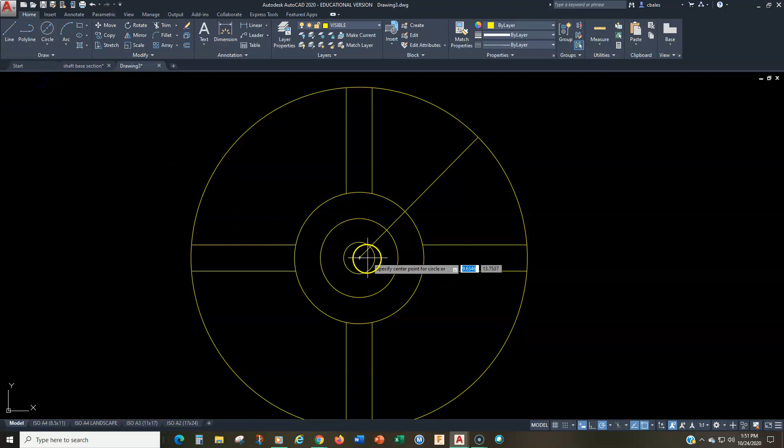So I'm going to draw a circle with a center diameter from the center here, and I'm going to draw it at a diameter of 90. Okay, so there it is right there. That is where the diameter 20 rounded end of the slot is going to go.

So now I'm going to draw a circle again, with a diameter 20. Okay, there we go. Now, one word of caution: make sure that you're drawing circles with diameter when it should be a diameter, and radius when it should be a radius. A common mistake is to draw a circle with diameter 20 but not pay attention and actually use the radius circle, or vice versa. In which case you're either going to get a circle twice as big as it should be, or half as big as it should be, and that's going to make your drawing look weird and wrong.

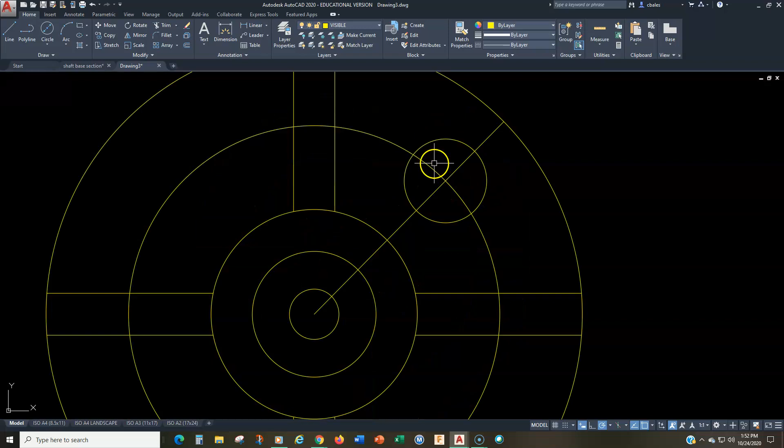So now we need to get the sides of this. Let me caution you here, because another common problem I see is for people to grab this end and go like this. Let me draw this line at 45 degrees right there. Okay, and that kind of looks right, but it's not right. The reason why it's not right is because it is not from the tangent. This intersection is not where you project this line from. Where you project the line from is from the tangent right here, okay?

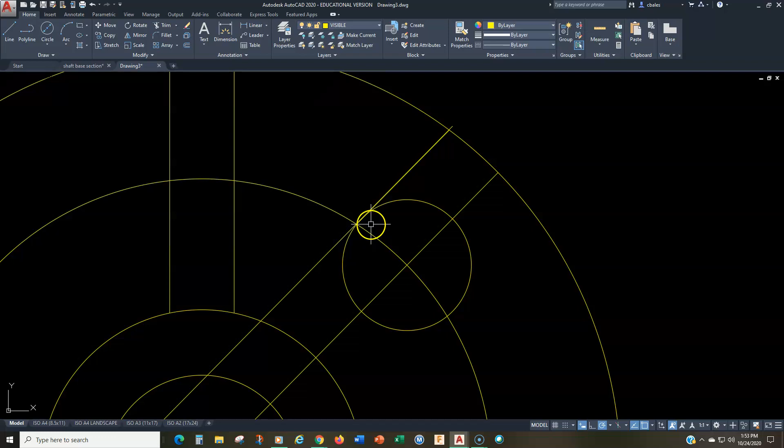So let me show you how we can get that. One way to do that, I'll do it on this side, is to use the offset command. I'm going to offset, the diameter of this circle is 20, so I'm going to offset 10. So let's do an offset of 10, and then I'm going to offset the center out like this. Now, you might think that looks pretty good, but when you go in here, you can see where the error is.

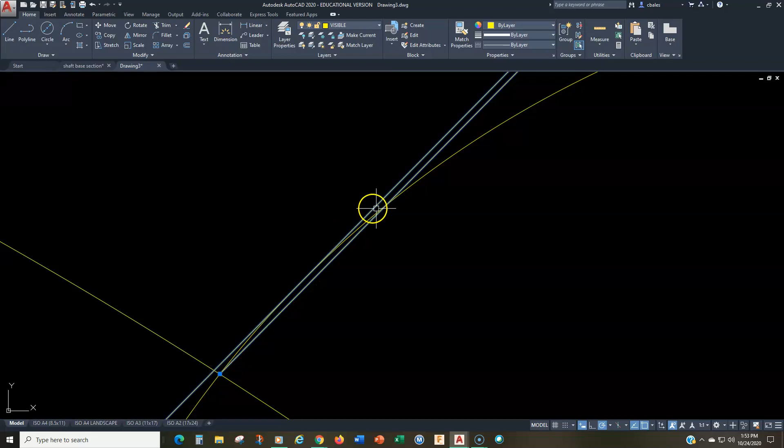This is the correct line, and you see how it comes in tangent right there? This is the incorrect line, and that comes from the intersection here. So you want to be careful how you draw this. By the way, I will be able to notice that on the drawing when you turn it in, so just be aware of that.

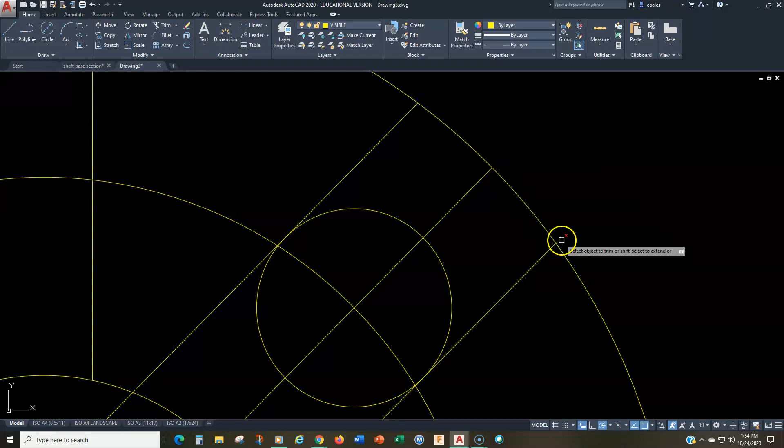Now I got to get in here and erase the bad one. Let's see, there's the bad one. And I'll just offset again. All right, and now I can trim this out like this, and we can trim this back. Now here, again, I feel like I'm giving away all my tricks for grading here, but if we trim it back right here, where are we trimming it to?

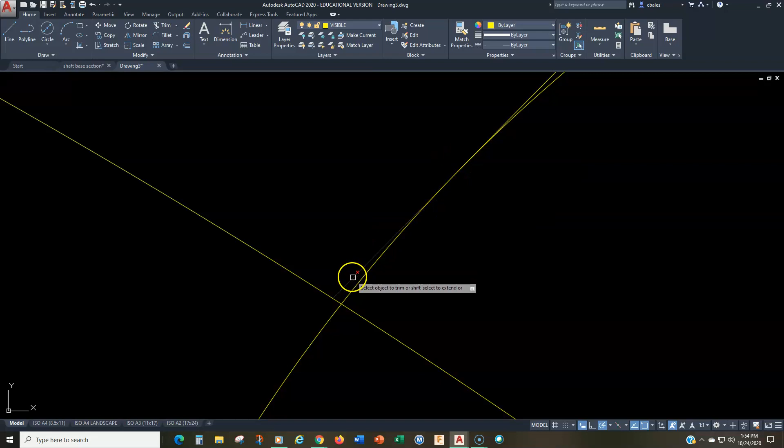The curve, the bolt circle diameter - that's wrong, and let me show you. We trim this back, and then we look in there. Aha, that's not the tangent. The tangent is up here, so it needs to be trimmed back to the tangent. Okay, so all these little things, like I said, I feel like I'm giving away all the secrets here, so you want to be careful of that.

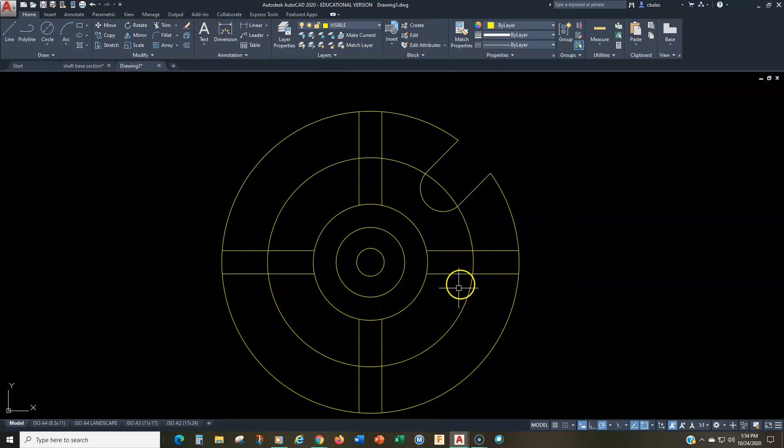And then we can trim this back like that, and then that's correct, right? And now we can get rid of that, and we can even get rid of that. Okay, so now I'm going to go ahead - I know I'm going to need this as a center line, so I'm going to go ahead and turn that to a center circle, because that's the bolt circle. So I have one slot done.

And now I want to do 3 more, for a total of 4. So I'm going to use the array command.

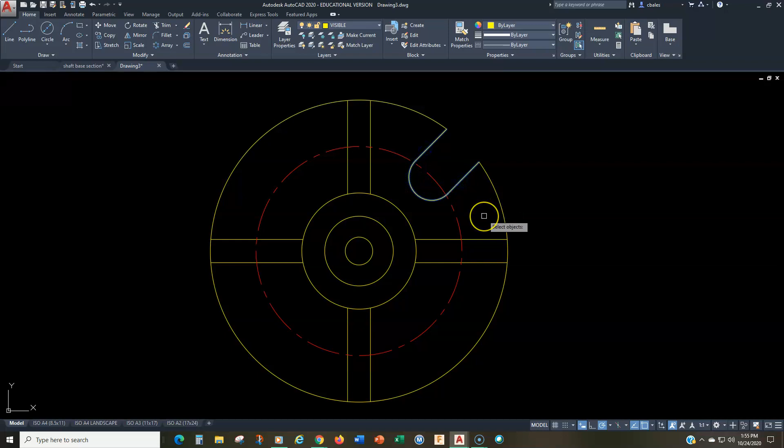We go to the array command, and we're going to use a polar array. Then we select the objects we want to array. Array is just a copy in a pattern. I want to copy these 3 objects, the 2 lines and the arc here. And I'm done, so I'll hit enter.

It says specify the center point of the array. I want to rotate them all around this center. You can see where it gives us that. Now it's giving us the default settings here, and if you look on the ribbon, it's changed to the array creation ribbon.

We go over to the panel where it says number of items. We want 4 — this is total items. So we just type in 4 items right here, and we can see that updates.

We don't need to do anything with rows or levels, that's not applicable here. But we do want to make sure associative is off. Right now associative is on, so we turn that off.

We want rotate items on, and the direction doesn't really matter because we're doing a full circle. If we take off rotate items, that's what we get, and you can see that's not correct. So we definitely want rotate items.

And then we're done with that, so I'm going to close the array, and there we go. Now we can finish this up by just trimming out the center sections there. I'm not going to put the rest of the center marks in here right now.

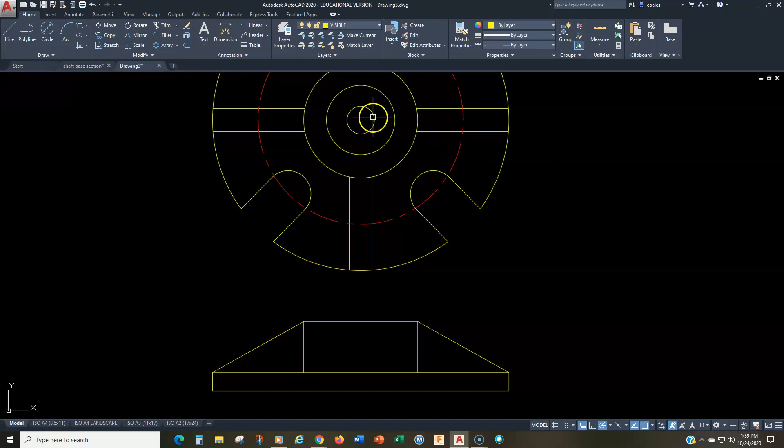So what that means is we have a diameter 12 hole, which is right there — that's the small hole, hence the small number. And we have a diameter 30 here that's counterbored down 10 millimeters. So I'm going to first offset 10 millimeters.

Go down like that. Then I'm going to draw a line from here to here, and from here to here — that's the diameter 30 part. I can trim that out, so there's the counterbore.

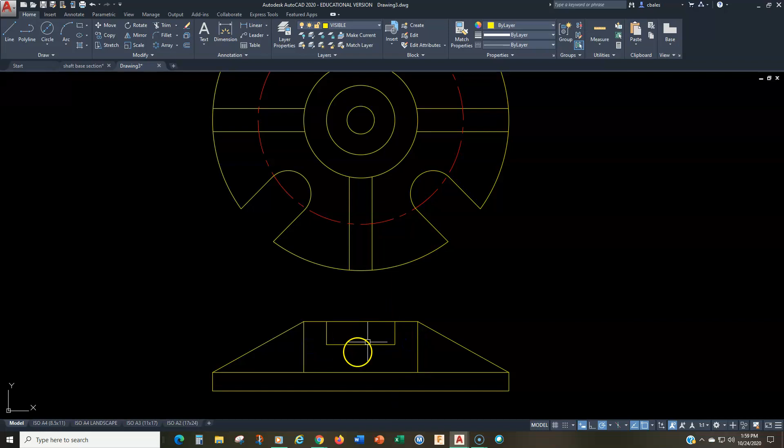Now the diameter 12 hole will just project from the quadrant here. By the way, this is Object Snap Quadrant, which I have on, in case you did not know. Okay, so there we go.

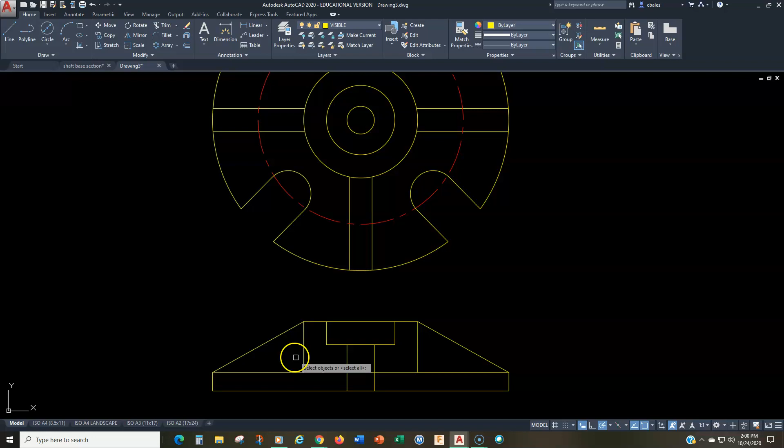Now, of course, that's going to be visible, because it's a section view. And in fact, this line right there has got to be trimmed. So I'm going to trim this out from between here, right? So that's correct. Now, how do we do the slots?

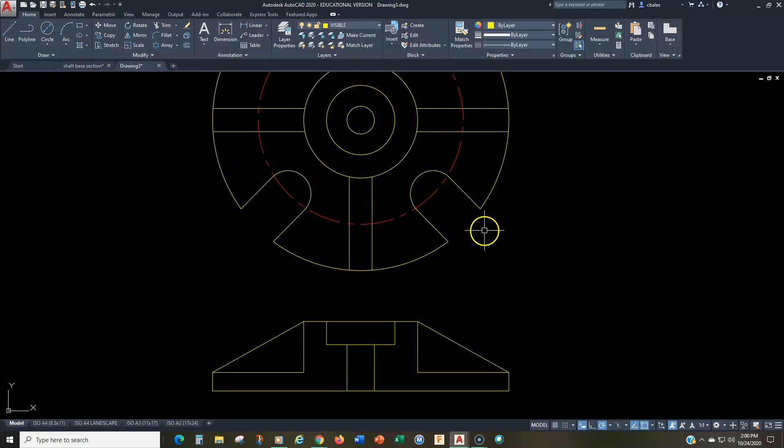This is important in the presentation for section views. We talked about how features that are not in the plane of projection need to be rotated as if they were in the plane of projection. So this slot — it really doesn't matter — we're going to draw it as if it's in this plane of projection.

So really what I want to do is carry this point around there. Let me just show you basically what I'm doing — this is just for illustration, this isn't actually what you're doing. I'll show you: what we're actually going to do is draw this as if it was right there.

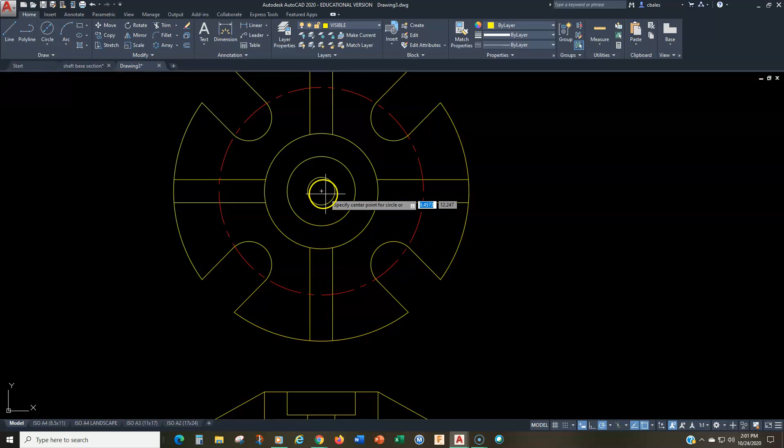Okay, as if it was right there. Now, of course, we don't want to actually leave it there, so I'll show you a little trick here. Let's go back. I'm going to draw a circle to the intersection right there, and you see where that traces up? Now I can project down like that.

That's it. Now I can get rid of these construction lines because we need part of that one. Hold on, let me trim that. And now we can erase this. All right, so there we go.

And we need the same thing on the other side, so I'm just going to use the mirror command, select this, and do the mirror from, choosing the center here, down like that. And then there we go. That's our section view complete with the aligned slots, or the slots aligned in this full section.

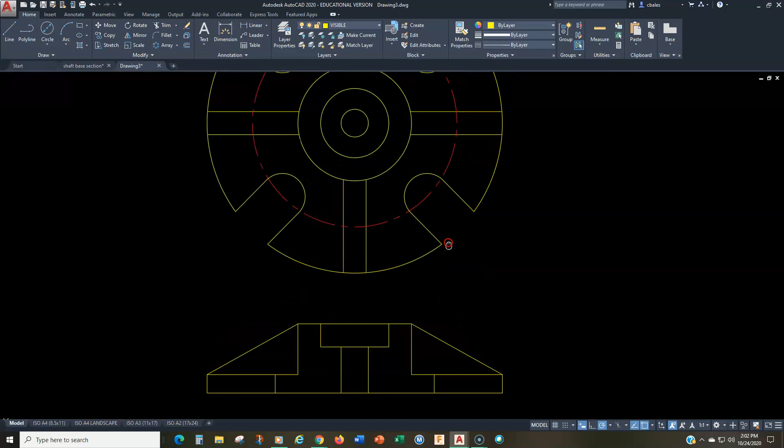All right, let's go ahead and put the section lines in here. So we change to the section layer, go to hatching, and come in here. Yikes, that's not the right hatch pattern. I'm going to click in there and go up to ANSI 31 and make sure that's correct. Actually, the angle is fine, and the scale is also good, so we're going to leave it just like that. I'm going to close that.

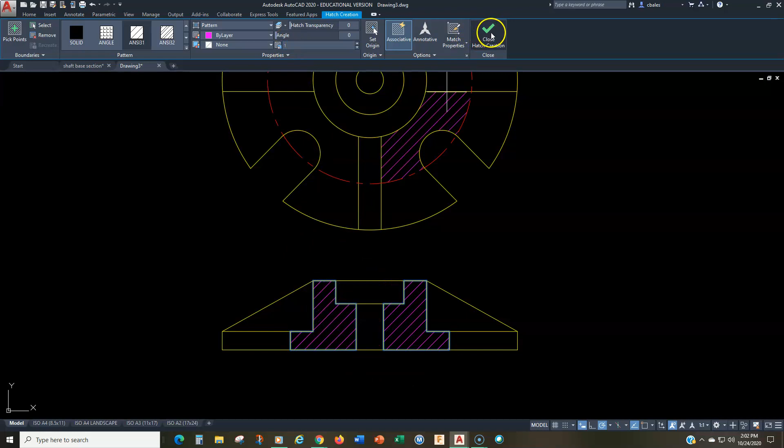All right, and now we can finish up this object. We want to put in the top view, we need to put in center marks. So let's change to the center layer and see what our center mark looks like. If we pick the outer circle right there, okay, that doesn't look bad. Now we do need center marks here, okay?

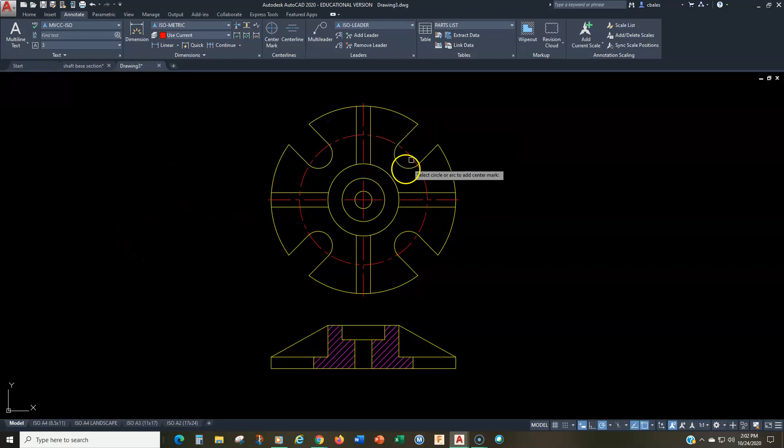So let me caution you on this, because if you use the center mark command, it's just going to come out all yucky and make a lot of extra work. Let me show you. I do the center mark, and let's do that right there. Well, first of all, that needs to be rotated, okay? So that's wrong the way it is. It needs to be rotated in alignment with the slot. So that's fine, we can do that.

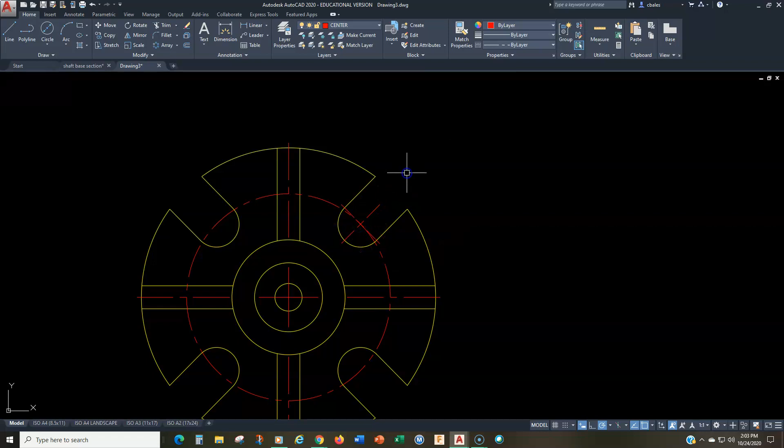We can go to rotate and select that feature right there, and we can choose the center, making sure to get the center, and rotate it 45 degrees. But then, see how we have that line that's kind of adjacent to or tangential to the curve? Well, the curve is what we really need. We do not need this line here, the line running tangent to it.

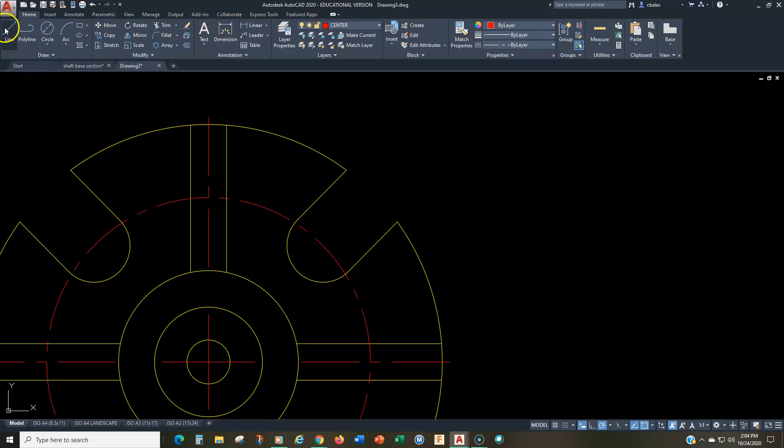But as you've seen with other examples, the center mark command is really persnickety about getting rid of portions of the center mark. So guess what, people, this is just not going to work. So I'm just going to erase that. And what I'm going to do is just draw, let's make sure I'm still on the center line, draw a line from the center out to here.

Okay, just like that. Now I'm going to also extend. So let's see, how am I going to do this? I'm going to grab this and tweak it out like this and see if I can project that across. Yeah, that's good right there. Okay, and now I do need to extend that slightly.

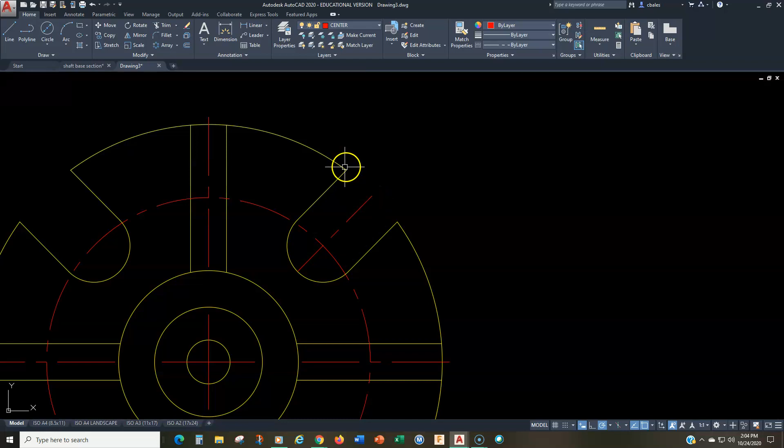Remember that for a metric drawing, it has to extend 2 millimeters past the edge of the object, so 2 millimeters past the end here. Now, for those of you that are thinking this through, you are completely correct that me projecting straight across here is not necessarily how the curve is going to continue, which is going to be somewhere out here. But I think that's going to be okay.

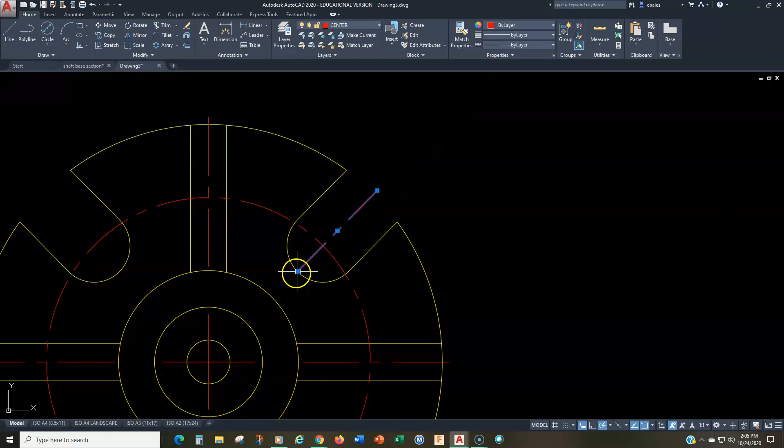All right, I think that's going to be fine. We don't need to be that close in proximity with the circle. And in fact, some could argue that the slot stops straight across there. So anyway, I'm going to grab this grip and pull it out and type in 2. Okay, right there. And I'm going to do the same thing down here: pick it, stretch it out, and type in 2. And then we do that.

Now, don't worry about the dash not lining up there. That's nearly impossible to fix like that. We'd have to really get in there and do some manipulation and stuff, and we're not going to worry about that. But I don't want you to have to do that 3 more times.

So, hey, let's go to the array command. We'll choose polar array, pick that, pick the center point, which is right there, and we'll do 4. Everything else should be good from the last time. And we just say okay, and then there it goes.

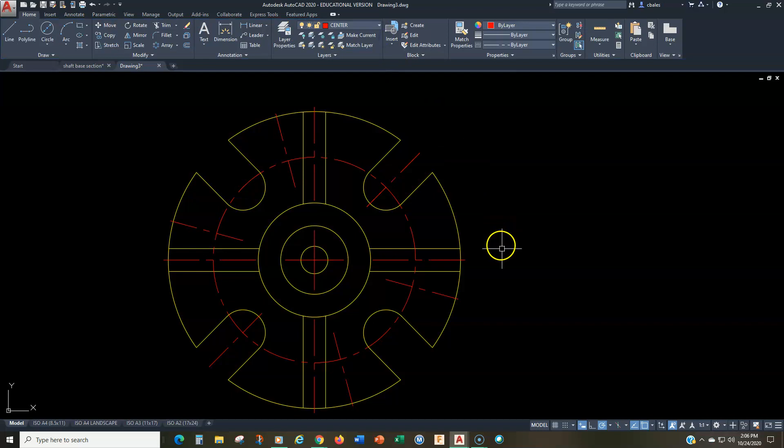Hey, well, what happened? Hold on, let's undo that. It didn't update. Let me try that again.

There we go, I forgot to hit the enter key. So then we close the array. All right, so that's that for the top view.

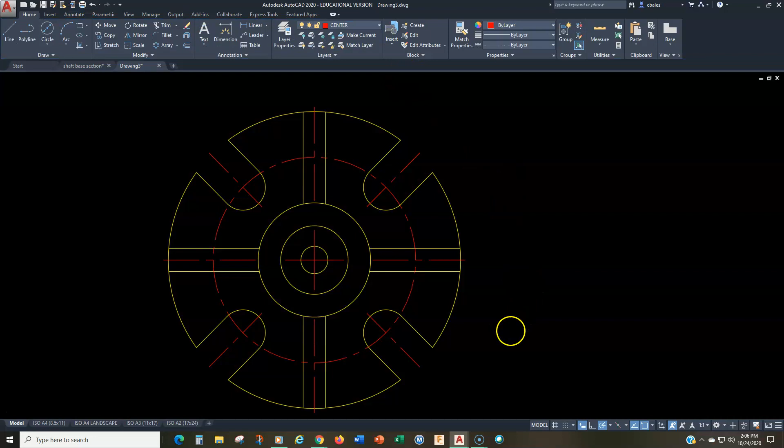And now for this one, let's put the center marks in there, annotate. I feel like most of the time we're talking about center marks in this class. It's so much work to do with the center marks. I really have to hand it to Autodesk for creating just a really terrible command.

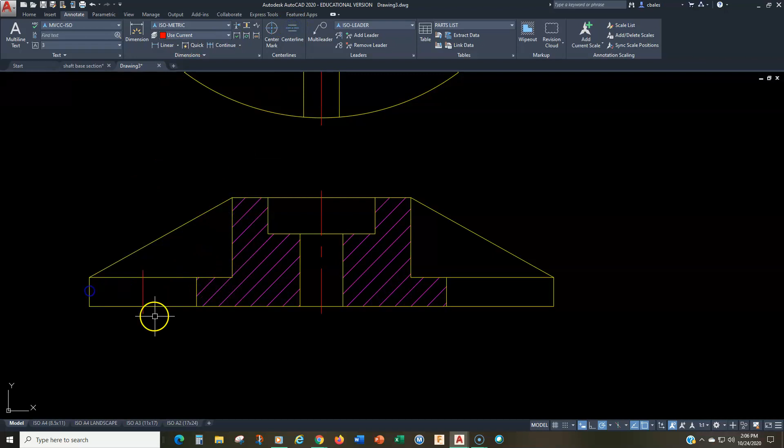Now the center mark down here is going to be a little bit tricky because we don't have an opposite line. So if we go like this and like this, guess what? That's not where the center of the cylindrical region is. The center for the cylindrical region is right there. See how this circle projects right there? So really we just want to draw a line from here down to here.

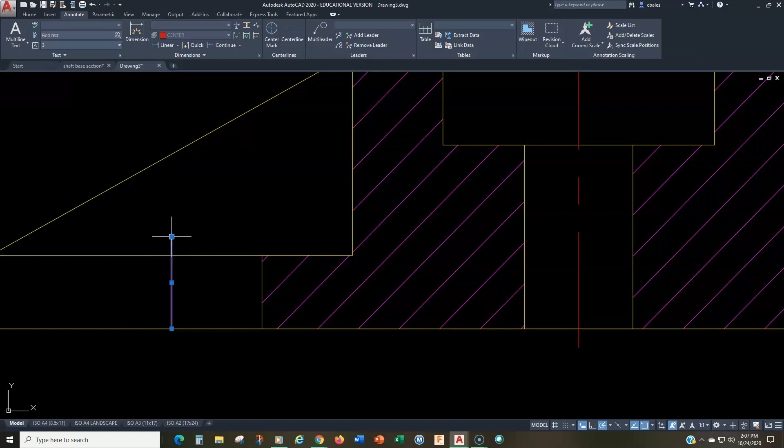All right, we can get rid of that. Wrong one, trim that off, and then we can use that little grip thing and go 2. And go 2, okay. And then we can use the mirror command, mirror. Go like that, all right.

So, my friends, that is the finished aligned section drawing of the flanged support. All right, so it's a full section view. Now remember, I said that the cutting plane line is not required by the national standards in full sections where there's only one section. So this follows that case, or this is where we can apply that.

Now you might be thinking, well wait a second, what about the aligned section? Does that break it? No, because this is still technically a full section with aligned features. So if you want to put in a cutting plane line, you're welcome to. I'm going to do that right now just to show you how to do that.

Again, to avoid double lines, I got to get rid of this. All right, and I'll replace it with a single vertical line there. So now I'm going to change. And you know, I would say that it's good practice to do this. I don't think it's too much work, but it's good practice because creating the cutting plane line with the arrows and stuff is kind of a pain in the butt. So it's just good practice to do this.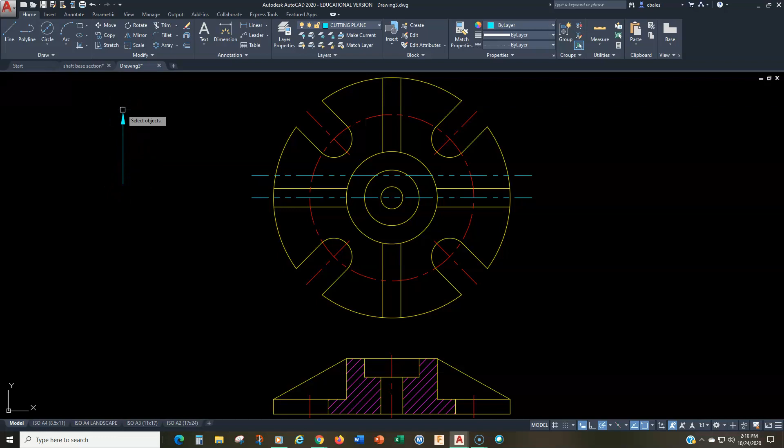And then let's get rid of this little bit right there. And then we'll move this from the tip here to the tip there. Right, and we can get rid of that. That looks hunky-dory. And we'll mirror this. Last time I copied it, so we'll mirror it this time. And we'll go from the center there, out like that.

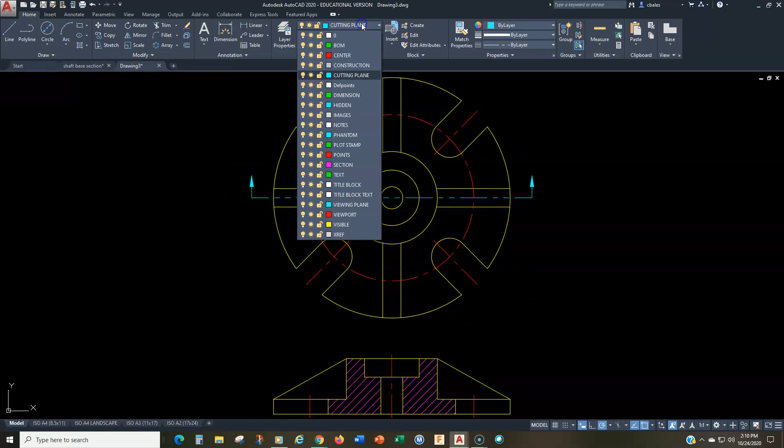That looks good. And we'll finish this up with a center line from here to here, because we have to replace that. But we're not going to forget to extend this 2 and 2. All right, so that's good.

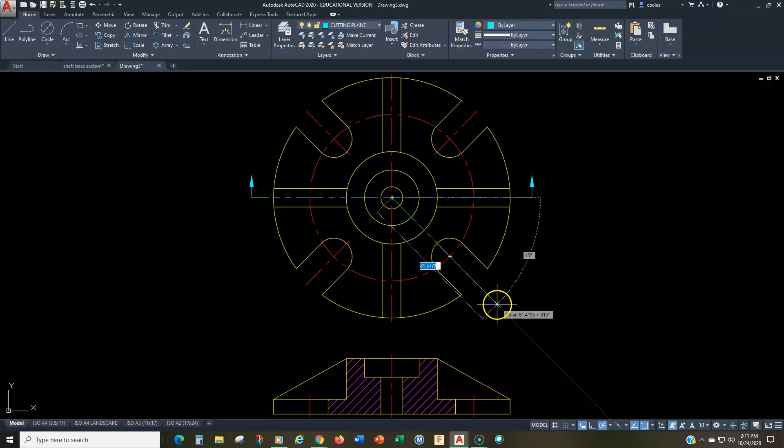And there you go. Now you might be thinking, wait a second, does the cutting plane line kind of have to do one of these things where it doesn't it have to do like this and come down here? You know, do something like that? No, doesn't have to do that. And in fact, I wouldn't say it would be wrong, but it's definitely unnecessary. It's bordering on wrong, let's put it that way.

I don't think there's a law or a rule in the standard that says that that's wrong, but it would be weird, let's put it that way. And I definitely don't want you to do that. These aligned features are understood to be rotated in the plane, and that's part of understanding how an orthographic drawing and section views are made.

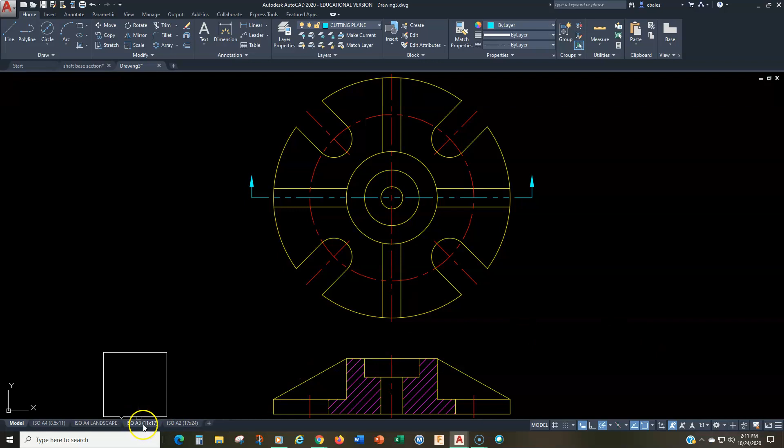This says we're going to get it set up for an A3 size layout, so we'll go in there, double click, do zoom extents, and let's see what scale. This is going to be 1:1. Oh perfect, right? There we go, 1:1, and everything's good to go.

All right, so that is the aligned sections problem, which is the flanged support. It's a metric drawing, all right, and I think that's it. If you have any other questions, please let me know. Otherwise, I'll see you in the next video.